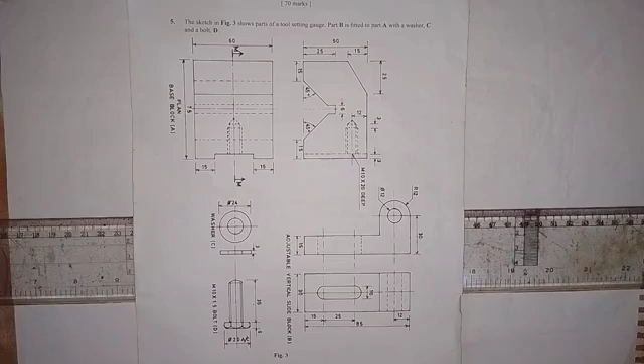Welcome to my channel. Here we're going to be working on this mechanical drawing problem, as we have it that the sketch in figure 3 shows part of a tool setting gauge. Part B is fitted to part A with a washer C and a bolt D.

Okay, so we have the diagrams and the different parts, and this is part A. So this is part A, which is the plan, and then we have part B. This is part B, and then here we have part C, which is the washer, and then part D is the bolt. Then this is the front elevation, though it is not indicated, but this is the front elevation.

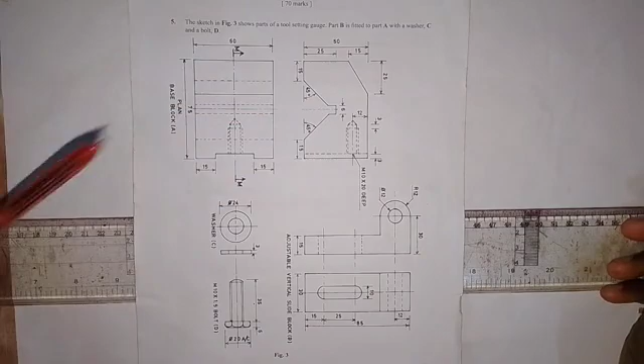Then on the next page we have the questions that we are to answer: draw full size in first angle orthographic projection the assembled part with part B at its maximum height, showing: question A, sectional front elevation along plane MM; question B, right end elevation; and question C, the plan.

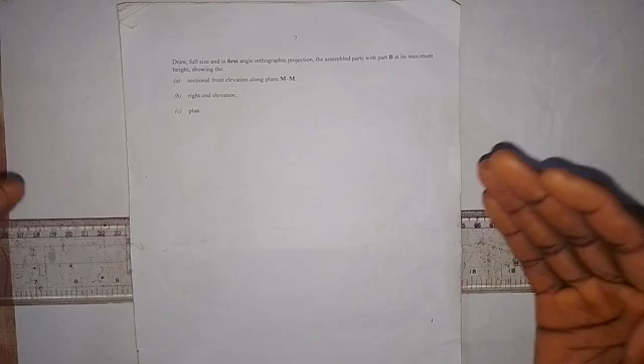So we are going to have a video for each of these problems, as we have 3 questions to answer: a video for question A, for question B, and for question C. Now, we are going to start with question A. Question A is about sectional front elevation along plane MM. So where is plane MM? Let me bring the question.

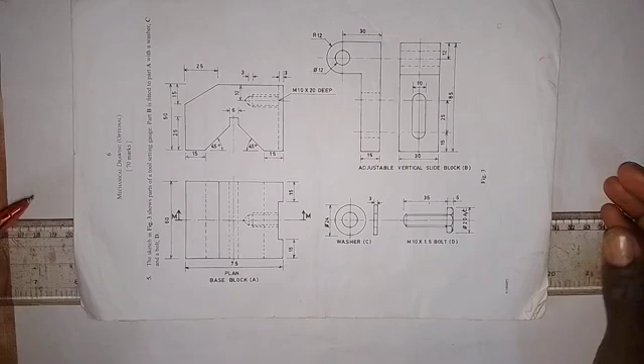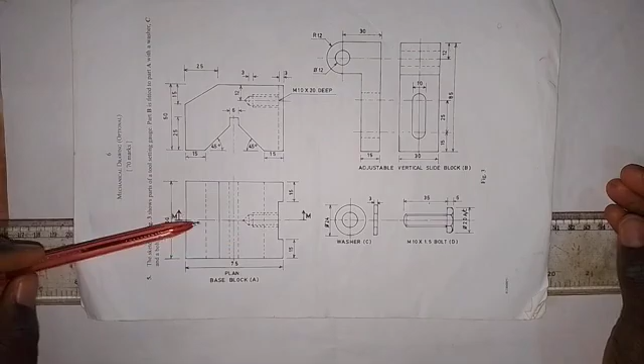So we need to position it like this so that you can see what we are to work on. Looking at what we have here, the cutting plane is placed in the plan. So this is cutting plane MM, and when the cutting plane goes like this, it means that we cut the whole object, and based on the direction of the arrows on this cutting plane, we have to take away this part. I want to see what we have left on this part here. So that is what we have here.

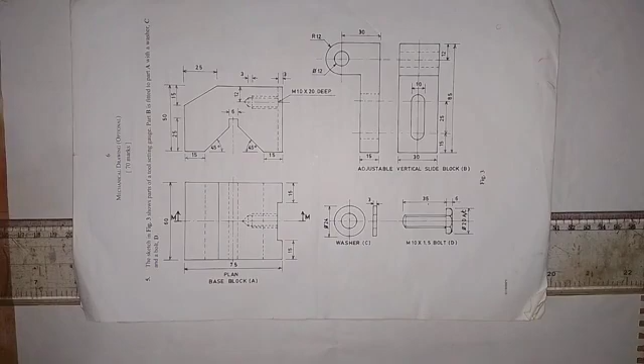But mind you, we are to place this adjustable vertical slide block together with this, and then we are putting this washer and the bolt inside, as you can see here. So what we have to do first is to replicate this particular front elevation. As I said, this is the front elevation, this is the plan. So we have to replicate this front elevation as we see it here.

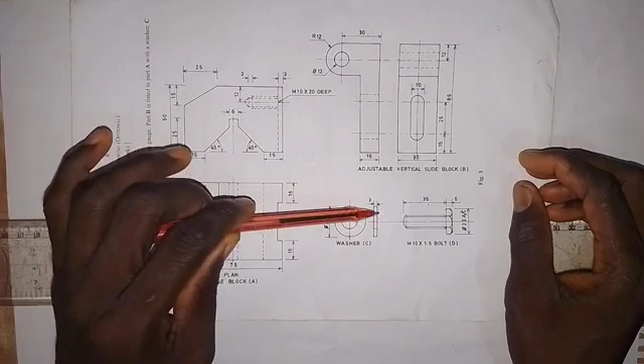Then we bring in this part. So this is the end elevation of this part as we have here. So we are bringing in this part, attached to this, and then we put in the washer, we put in the bolt. That is what we have to do. I'll be talking about the dimensions as we go on.

So let's start. The first thing to do is to draw a horizontal line. We need enough space. So I will come down like this and draw a horizontal line here. Let me come down more. So we draw a horizontal line here like this. Okay, so we have this horizontal line. What we want to do is to replicate this shape first.

Looking at the total distance from here to here, it is given to us in the plan as 75 millimeters. Before we take that 75 millimeters, we have to come to this end here. So we draw a vertical line up like this, and then on the horizontal, I will take a measurement of 75 millimeters. So this is 75 millimeters here. At this point, I'm going to draw a vertical line again, like this.

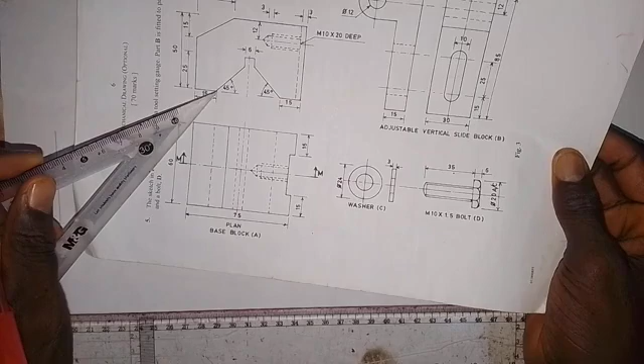Now look at the shape that we have here. From here to here is 15, and from here to here is also 15. And this line is inclined at an angle of 45, and this also is inclined at an angle of 45 degrees. So let's get that 15 first. I will take a measurement of 15 millimeters here, and then coming to this end, I will also take 15 millimeters.

And then the midpoint of that 75. If we divide 75 by 2, that will give us 37.5 millimeters. Okay.

All right. So we take a measurement of 37.5. So this is 37.5 millimeters, as we have here. So at this point, I'm going to draw a vertical center line, just to take it up a bit. So this is the vertical center line. So this vertical center line that I drew here is for this line that we have here at

this point. Now for this 15 that we have taken, let's first of all get this 6 that we have here to produce this shape. But before that, we need to locate this horizontal line that we have here, and its distance from the base here is 25. So let's take a measurement of 25 millimeters. I will take it from this end. So this is 25 millimeters.

So I'm going to draw a horizontal line here. So this is the horizontal line. So having taken the measurement of that 25, the next thing that I'm going to do is that, that's 6 millimeters that we have in the drawing, so I will take 3 millimeters to this side. So this is 3 millimeters. And coming here, I will also take 3 millimeters.

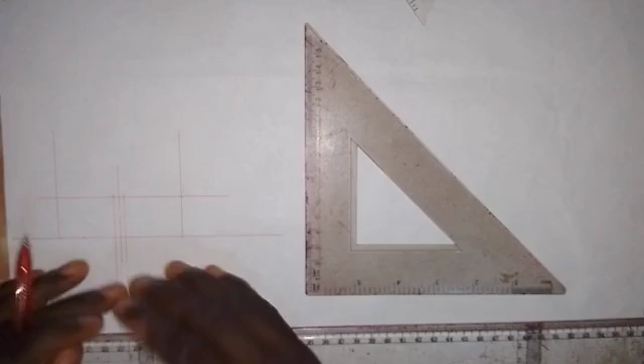So we have this. So at this point, I'm going to draw a vertical line. So here we draw a vertical line down here, and here we also draw a vertical line down. Because we are still going to draw the plan, that's why I projected it down. And then the next thing that we are going to do here,

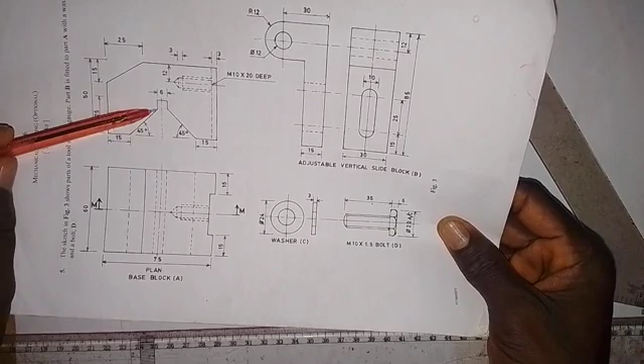is that if you look at this distance that we have here from here to here, it is not given to us. But for us to get this point, we need to draw this line at 45 degrees to the horizontal. Once it touches this line, we have it. We don't have to take that measurement. So this is my 45 degree set square. I will place it at this point, and then I will draw this line. So it touches it here.

Okay, then I will take it to this side at that same 15. So I will draw the line. So it touches it here. So that's it, we have completed that part. As you can see, the shape as drawn here has been replicated here. Now let's go for the next thing.

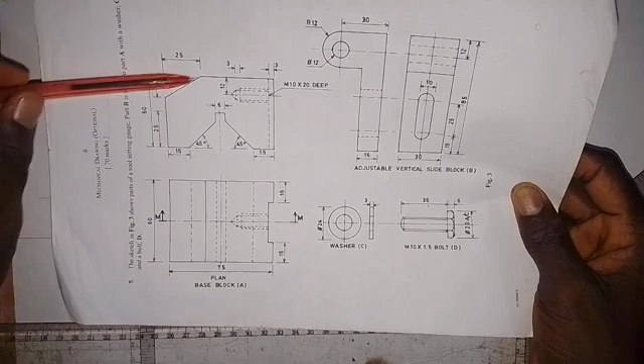So the next thing is for us to draw this line, and this line from the base here is 50 millimeters. And then for us to get this point, once we draw this line, we have to take a measurement of 15 millimeters down so that we can have this line. Okay, so what we have to do now is come onto this line. From here we take a measurement of 50 millimeters. Then I will take 15 millimeters down at once.

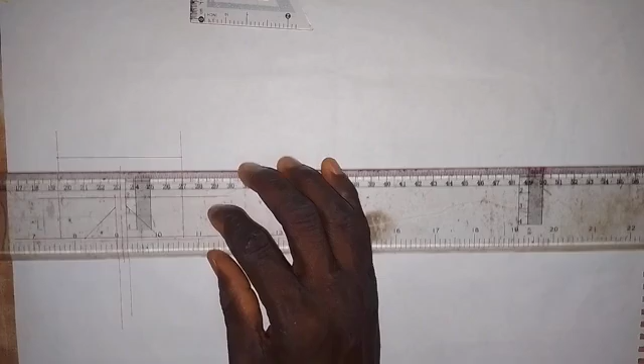So this is 15. So what I need to do here now is to draw the horizontal line like this. Okay, then I already have that 15 here. So the next thing that I'm going to do is that, for us to get this point on this line, we have to take a measurement of 25, from here inward. So I will take the measurement now. So this is 25 millimeters here.

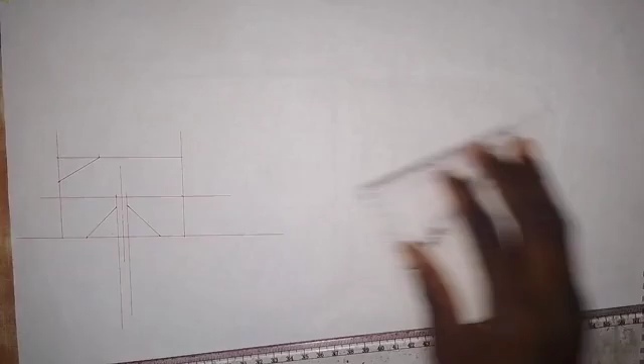Alright, so we join these 2 points together to get this line. Okay, so now we have this particular shape, though we are not done. We still have this part, and then we still have this also. So for us to get this line from here to here, it is 3 millimeters. So let's take that 3 millimeters.

So I will come down here and take a measurement of 3 millimeters. So this is 3 millimeters. So I will draw this line as a vertical line. I will even take it up.

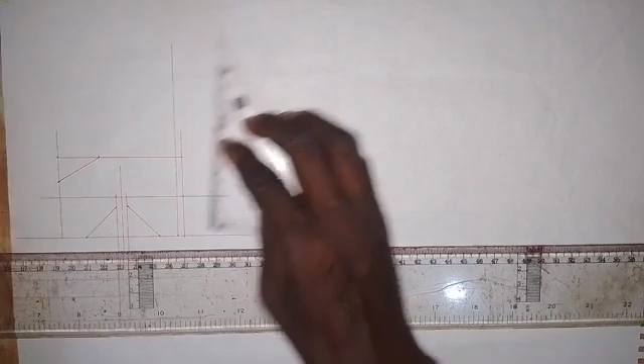So I will tell you the reason why I'm taking it up. So it goes up like this. Alright, so having drawn this line, the next thing that I'm going to do is...

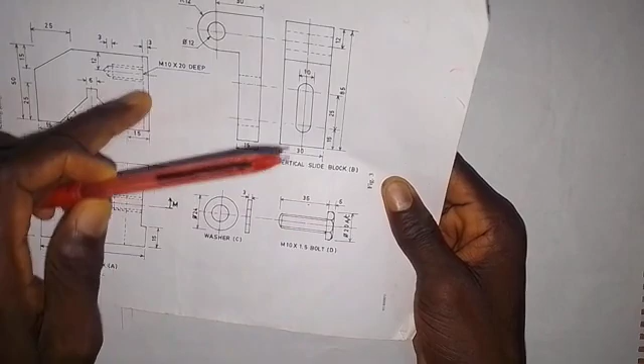Let's work on this part, because we are placing it here, and then we put the washer, we put the bolt. So we are done with this part. The next thing we are going to do, I want us to bring this in. Before we produce this, this is where we are going to insert the bolt, and then the washer will also be outside, but you'll see what I'm going to do, this thing is very simple. Now let's work on this.

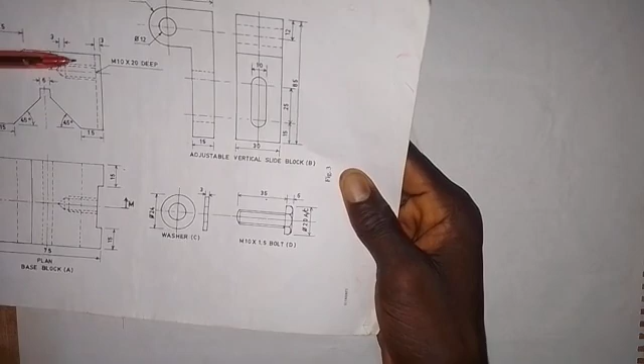The thickness of this from here to here is 15 millimeters. But most importantly, we need to locate this point, this center line. So what we have to do first now is locate the center line here. Once we get the center line, we'll be able to place this.

The distance of this center line here from this line is 12 millimeters. So I will come up here, take a measurement of 12 millimeters. This is 12 millimeters, and I'm going to draw a horizontal center line. So it goes like this. Alright, so we have the horizontal center line here.

Having drawn the horizontal center line, the next thing I'm going to do is look at this now. This distance of the center line from the base here is given as 15 millimeters. So I will take a measurement from this center, 15 millimeters down. 15 millimeters down, so this is 15 millimeters. Then I'm going to draw a horizontal line, so the horizontal line goes like this.

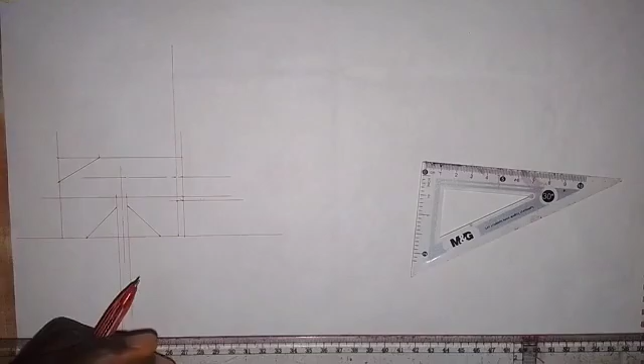Now, having drawn the horizontal line, I will come to this point here. On this line, I will take 15 millimeters outward, which is the thickness of this adjustable vertical slide. The thickness from here to here is 15. So that 15 that I've taken is for this distance from here to here. At this point where I've taken that 15 millimeters, I'm going to draw a vertical line. So here I will draw a vertical line here. That is the reason why I drew this vertical line, because it's going to be part of this.

It's laying on this surface. Let me extend this a bit. So we draw this. Alright, having done that, the next thing I'm going to do is figure out the distance from here up. It is 85 millimeters. The distance is 85 millimeters. So let's take that measurement of 85 millimeters from here.

85 millimeters. So this is 85 millimeters. Here I'm going to draw a horizontal line at this point. We draw a horizontal line to this side. Okay, having done that, the next thing we are going to do is work on this curve. Let us work on this curve.

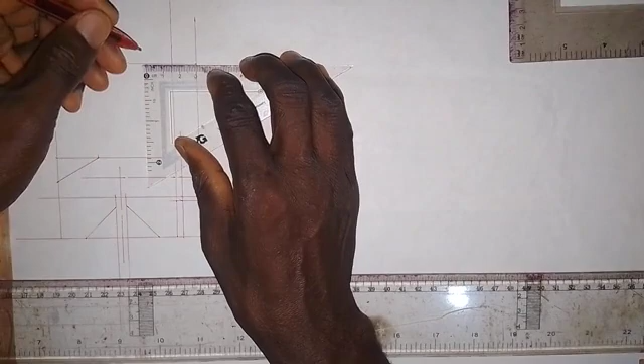For us to get the center of this curve and this circle, we have to take a measurement of 30 millimeters. So to get the center, from this point here, I will take a measurement of 30 millimeters. This is 30 millimeters. At this point, I'm going to draw a vertical center line. So we have it like this. Okay, so we have this.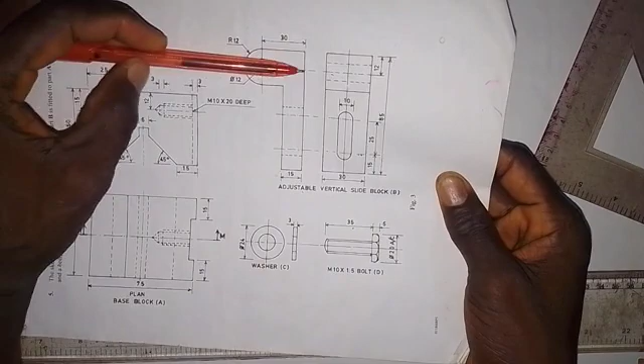Now, having done that, the next thing we are going to do is draw the curve. Before we can draw the curve, we need to locate this center line. This horizontal center line from this point is 12 millimeters. So I will take a measurement of 12 millimeters. But before that, the radius of this curve, this semicircle, is 12 millimeters. I'll take my compass at once and take a measurement of 12 millimeters on the ruler.

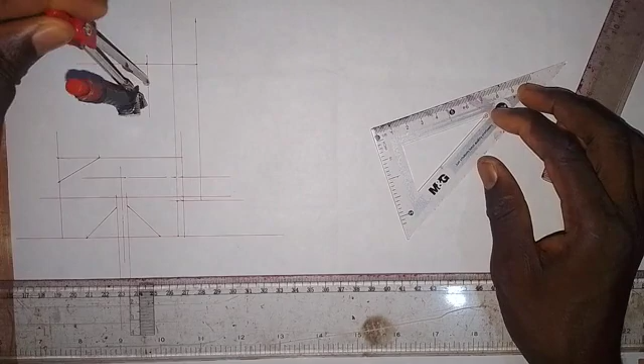12 millimeters on the ruler. This is 12 millimeters. So I'll place it at this point here on this line, and make an arc to locate the center. Then I will put it at this point here, and draw a semicircle as shown in the diagram.

So you can see that I've drawn the semicircle, like this. So we have the semicircle here. All right, having done that, we also have a circle inside.

The circle inside has a diameter of 12, so its radius is 6 as we are given. I will take a measurement of 6 millimeters here. That circle has a very small radius, so I put the point here and gently draw the circle, like this.

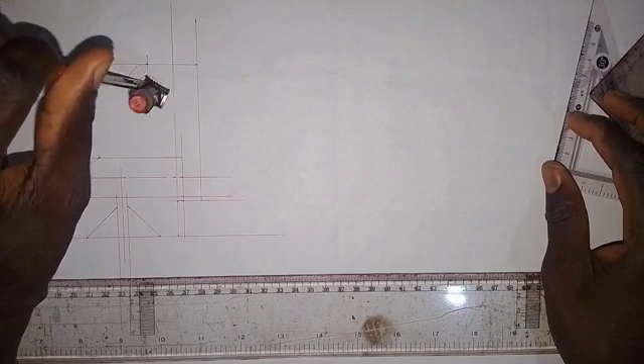Alright, so we have been able to draw the circle as we see it in the diagram. What I'm to do now is join this point together with this point, making it a thick line at once here. So we have this done.

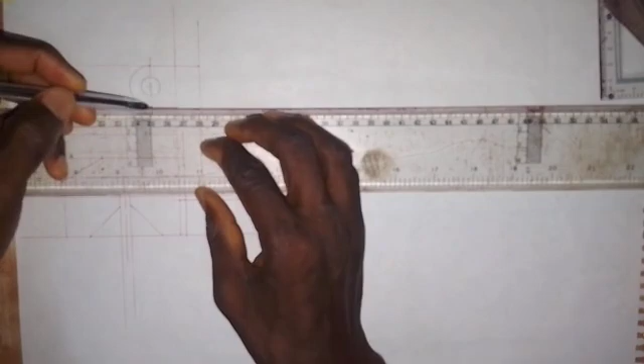So the next thing we are going to do as we proceed is look at the hole that we have here. We have this hole here, and we have been able to get a little part of it. Though we have not completed it, let's work on it now.

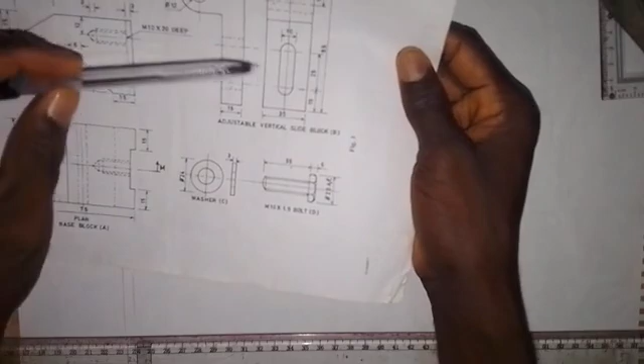From this center line that we have here, the distance is 25 millimeters apart. So we are going to take a measurement of 25 millimeters. From this center line, I will take a measurement of 25 millimeters up. So this is 25 millimeters up.

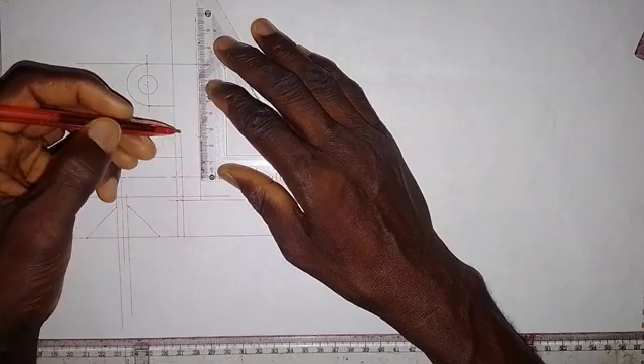Now, looking at what we have here, the diameter of this semicircle is 10 millimeters, meaning from the center to this side is 5, and from here to here is 5. So we have to take 5 millimeters down and 5 millimeters up after the 25 that we have taken. So what I mean is this.

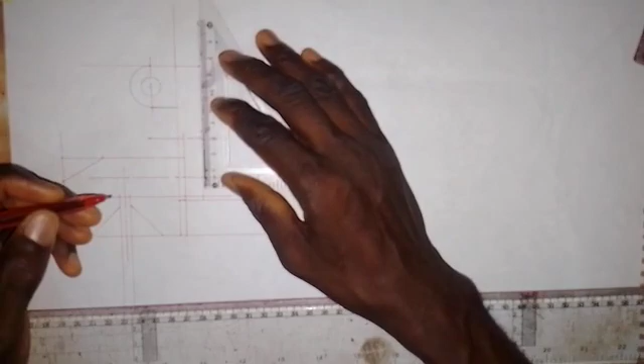If I draw this line as a center line up here, so we have this. I will now take a measurement of 5 millimeters from this center line up - this is 5 millimeters up. Then I will come down here and take 5 millimeters down - this is 5 millimeters down. Then I'm going to draw this horizontal line from here to here, and also draw a horizontal line from here to here. Alright, so we have that.

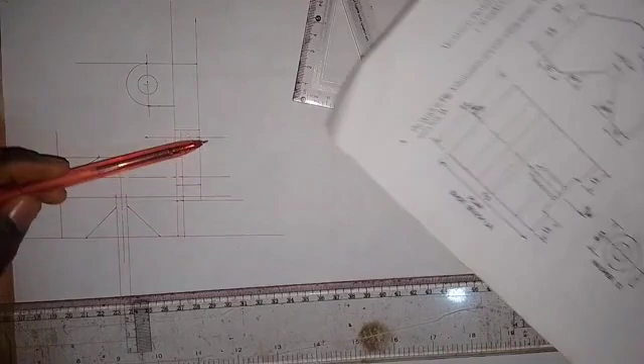Okay, so the next thing we are going to do now is place this washer on this surface here. We have to place this washer on this surface, and then we also place this bolt over the washer. Now, the thickness of the washer is 3 millimeters, while its diameter is 24 millimeters.

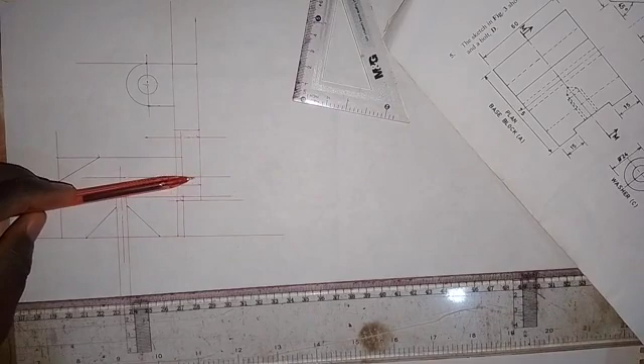It's 24 millimeters. So what we have to do now - the center line on the washer here is the same as this center line, so we are making use of this center line. So what we have to do is divide 24 by 2, which gives us 12 millimeters.

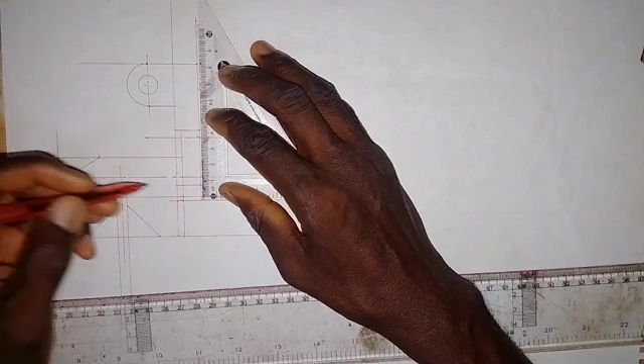So we have to take a measurement of 12 millimeters down. So here we have 12 millimeters, this is 12 millimeters here. Then we take 12 millimeters up from there, that's 24, so this is 12 millimeters. So at this point, I'm going to draw a horizontal line, and here also I will draw a horizontal line like this.

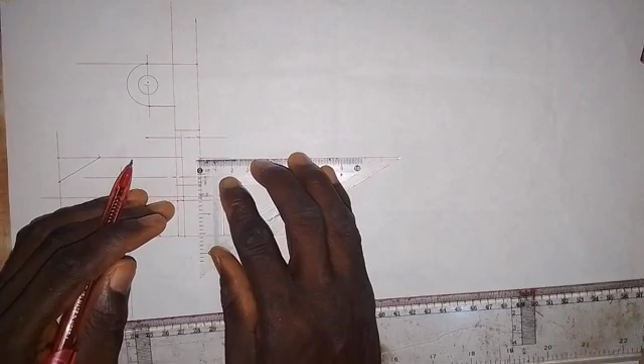Then the thickness of the washer is 3 millimeters, so I take a measurement of 3 millimeters here - this is 3 millimeters. So here I will draw a vertical line at this point. Okay, so we have placed the washer there.

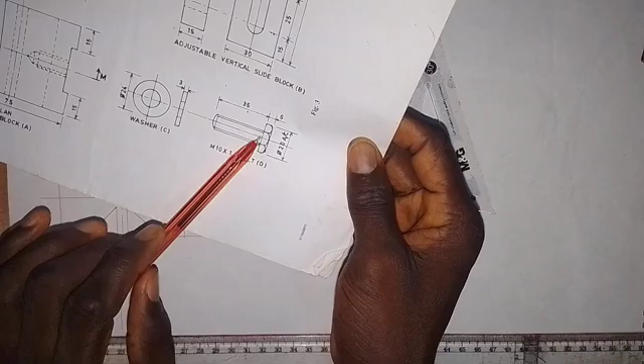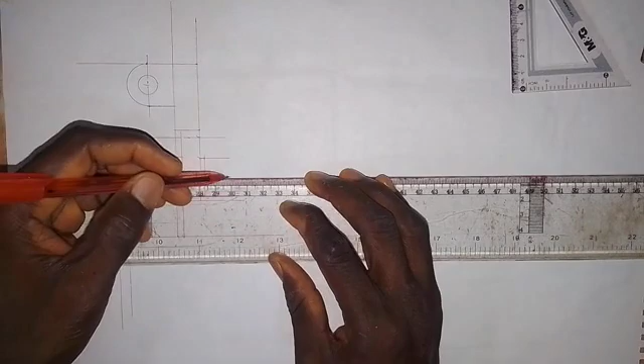The next thing we are going to do is create - because by the time the bolt enters here, this head of the bolt, which is a hexagonal bolt, will be laid on the washer - so what we have to do now is create this head of the bolt. We are told that the distance across corners of this hexagon is 20. So we extend this center line to the right side, and at this point I'm going to draw a vertical center line like this.

So then I will take my compass, divide that 20, that is distance across corners, by 2, and that will give us 10. So for that 10, I'm going to put the pinpoint on my compass here and draw a semicircle. I only need a semicircle.

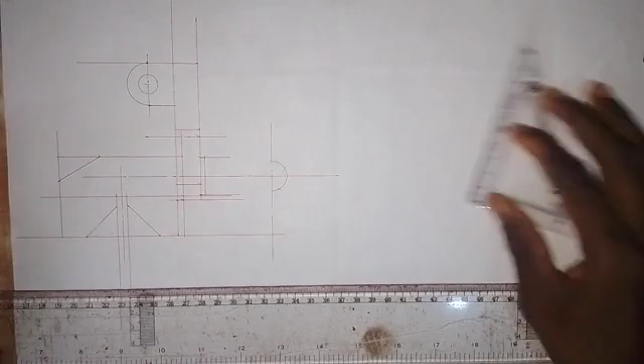So this semicircle now, I will divide into 6 equal parts. So we have this point, we have the points on it. So what I'm going to do now, into 3, also I need to put it here into 6. So we have this. All right, so I divided it into a number of equal parts.

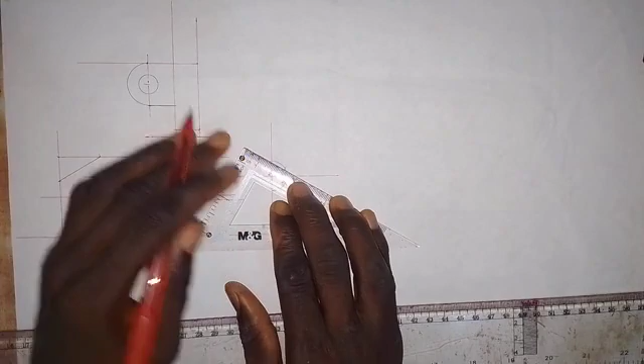So I will join this together. Join these 2 points together, and then I will join. I will join this point together. So these 2 points, I will join them together like this, and I will also join this point together. Okay, I only need these ones that I've done. So that's what we need.

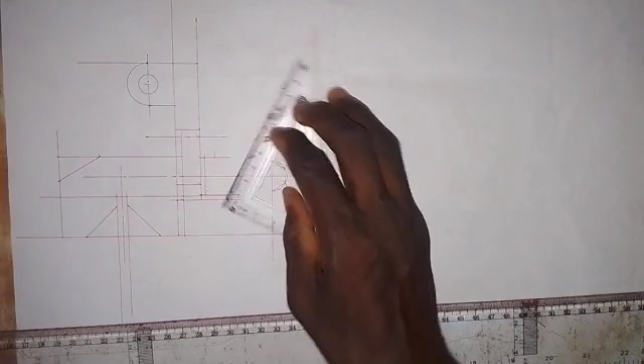So what I'm going to do now is, looking at the thickness of the hexagon, it is 6. So I need to take a measurement of 6 millimeters on this line. This is 6 millimeters here. So here I'm going to draw a vertical line. So here we have the vertical line here.

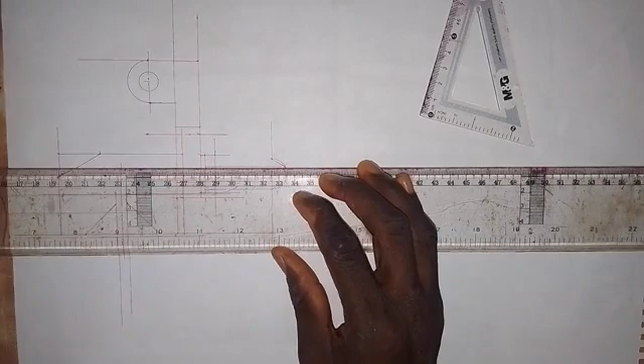So the next thing I'm going to do is, from this point on the hexagon, I will draw a horizontal line, like this. Then coming to this point, I will also draw a horizontal line here. Then coming to this point here, I will draw a horizontal line. Then at this point, I will draw a horizontal line. Okay, so you can see what we have done.

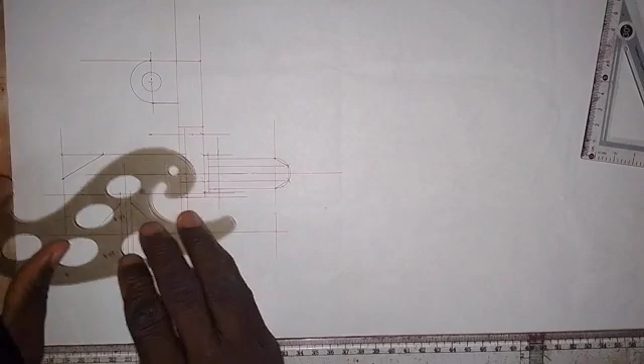Alright, so what we have to do now is to shape the head of the hexagonal bolt. As you can see here, we have small curves on it. So I usually make use of my French curve to do that. It is just a small bolt. So I usually use my French curve to do this. So I just set it like this, and then draw the curve.

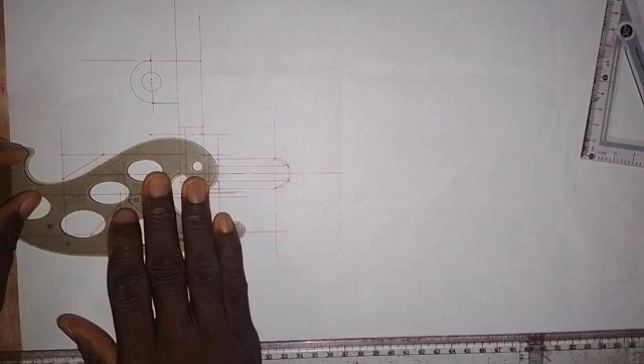Okay, draw the curve like this, and then coming to this side, I will also draw the curve here. Okay, so we have the curve on it, and then coming to this part here, the middle one, which is more larger than the ones that we have done, so I will draw the curve like this. Alright, so you can see.

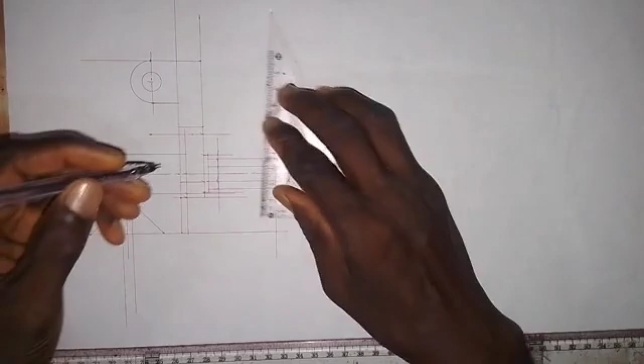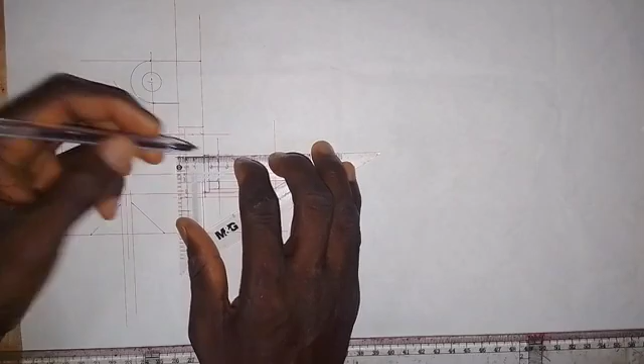Okay, so now let's just make this line a thick line a bit, and this line is a thick line too, so it combines both the washer and the bolt together, and this line also will be a thick line, from here to here, even down here. So we have the washer laid on, so this is okay. We also make this line a thick line from here to here. This line will be a thick line, and this line will also be a thick line, and this line is also a thick line, and then we also make this line thick. So you can see that the washer and the bolt, you can see them clearly.

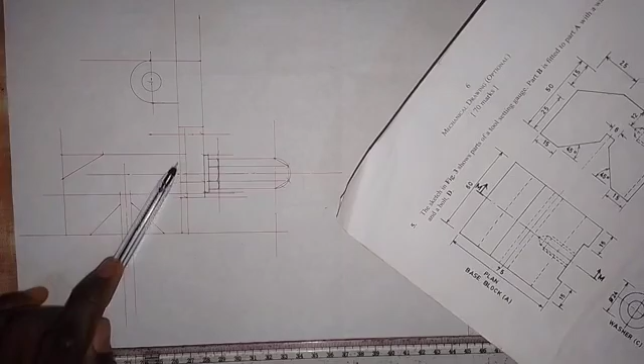So what we are left to do now, after this, we have just one more thing to do, is to show that the bolt is in here. So what we have here for the bolt, from this line where we have this 3, as we have 3 here, that line 3 is here. So we have the depth of this hole, M10 by 20 deep. So the bolt is M10, as is indicated here, M10 times 1.5. So we have what we have, M10 by 20 deep. So the depth is 20 as we have here.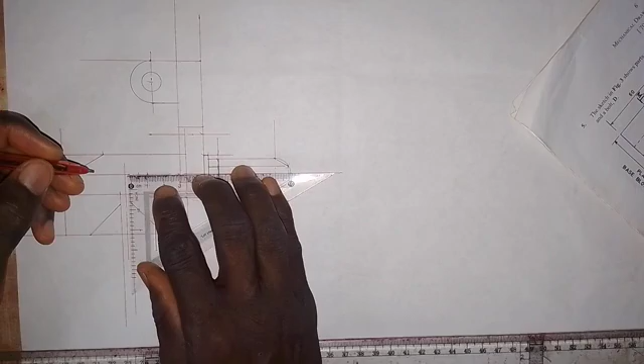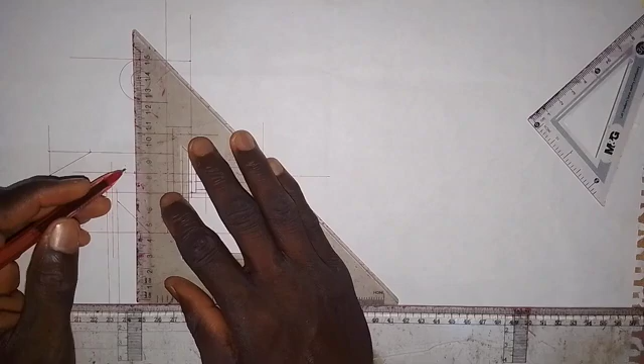Alright, so that 3 we are not taking it now. So then what we have to do here is to draw a vertical line at this point. So we make a vertical line, just a short line, at this point. So there is something that we need to do.

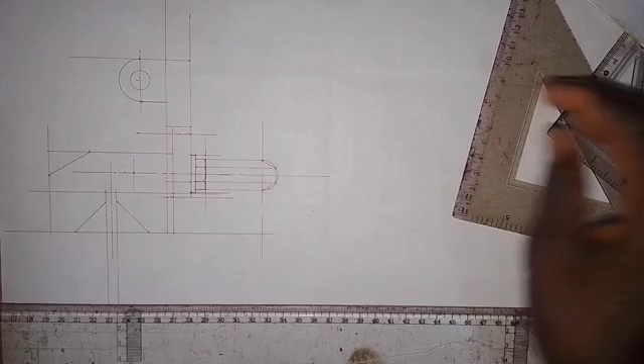We need to look at the length of the bolt thread. So the length of the bolt thread from here to here is 35. So we need to do a simple calculation. So this is 35, and that distance is being taken from this line. So from this line we have to take a measurement of 35 millimeters forward on the bolt. Okay, so we take 35 millimeters forward.

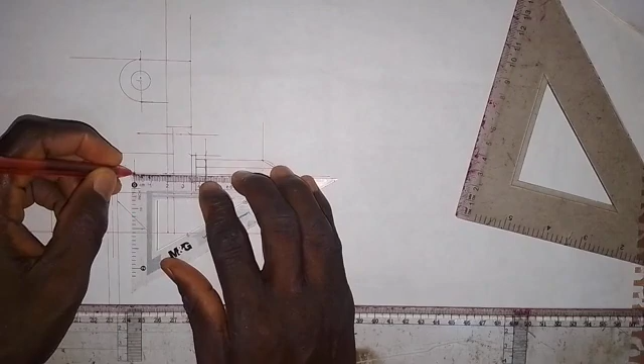So looking at this, okay. All right, so this is line 35. So we have the line here, which is 35 millimeters. Okay, and then for the bolt, the thickness is 10. So we take 5 down from the center line, so 5 millimeters down and 5 millimeters up.

So we draw this horizontal line. So we draw a horizontal line from here to here, and we also draw a horizontal line from here to here. All right, so we have this.

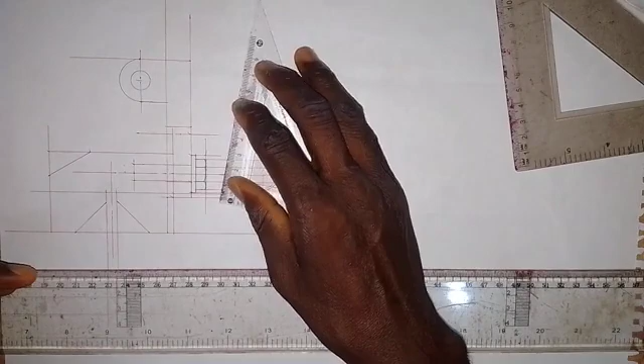Okay, so then the other part that we have here, we need to take 1 millimeter down on the bolt. Then we come up here, we take 1 millimeter up. Okay, so here I'm going to draw a horizontal line. Here we draw a horizontal line.

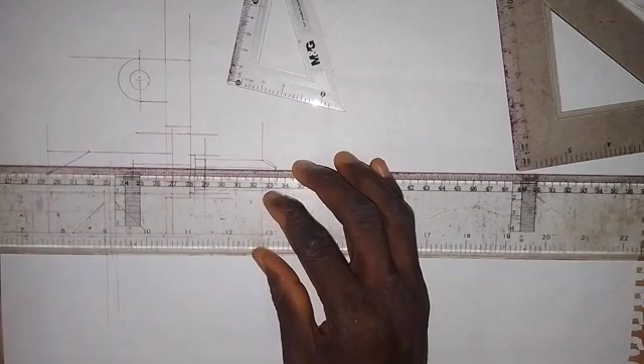Okay, so we extend it forward, and then we come up here on that 1 millimeter. So we draw a horizontal line, and we extend it forward. Okay, so we have this now. All right, and then the next thing that I'm going to do is this 3 millimeters that we have here. Okay, so we draw this line.

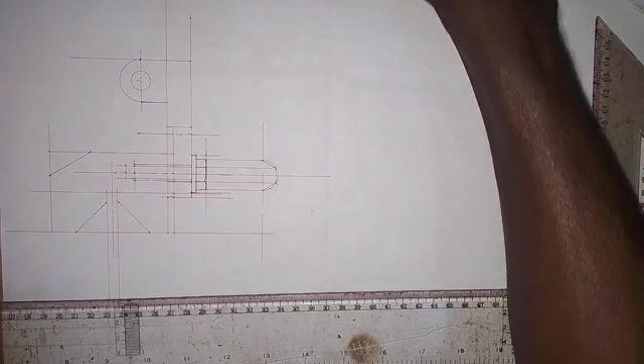Okay, so then the next thing that I'm going to do is take 3 millimeters forward to get the shape that we have there. So this is 3 millimeters. So we need to locate the midpoint. Okay, so I will now join this point together with this point, and then I will join this point together with this. So we have the shape as we see it there.

So this line will now be a thick line. We make this line a thick line because in this sectional view, a part of the whole body is cut off. So we see this bolt clearly. Okay, so that's why I'm making this line a thick line.

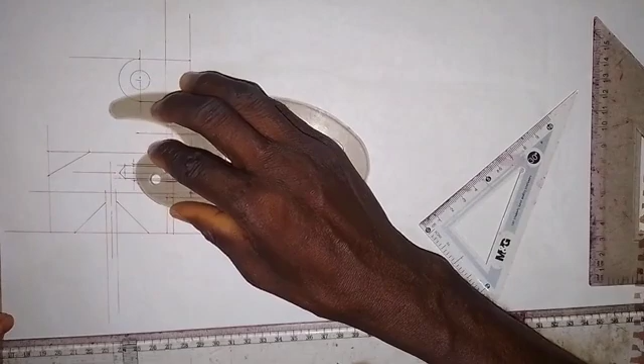And then another thing that we have here, we have a curve on the top of the bolt. So I'll just use my French curve to produce the curve, joining these 2 points together like this. So this is how easy it is. Okay, so we have the bolt in place. All right, so having fixed the bolt inside, what I'm to do now is to bring out some part of the object that will be thickened. So let me do that while I pause the video.

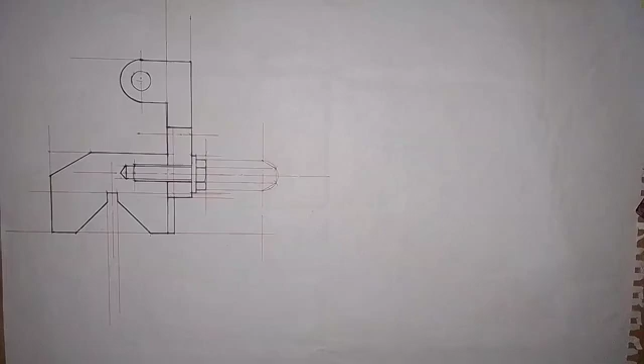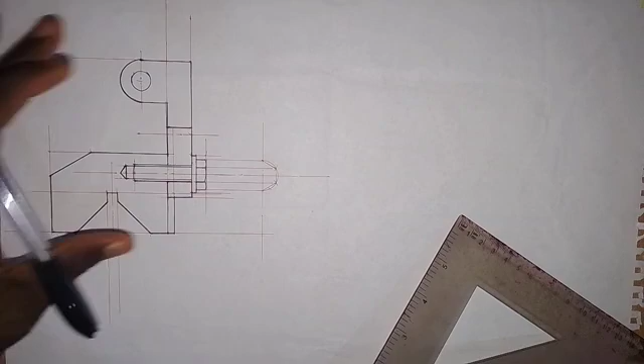All right, the next thing that we have to do is to hash the surface that we need to hash here. So we are going to hash this surface. We leave the bolt and washer unhashed. Then we are also going to hash this part. So both of them will be hashed in different directions. I'll pause the video and do that. Then when I'm done, you will see how it should look.

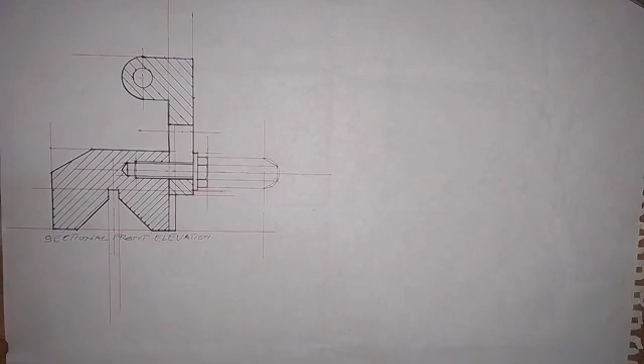All right, this is the sectional front elevation. So we hash this part as you see it here, and you have to hash this part also in a different direction using 45 degree set squares. As simple as I've done it here. Let's meet on the next question, which is for the right end elevation.